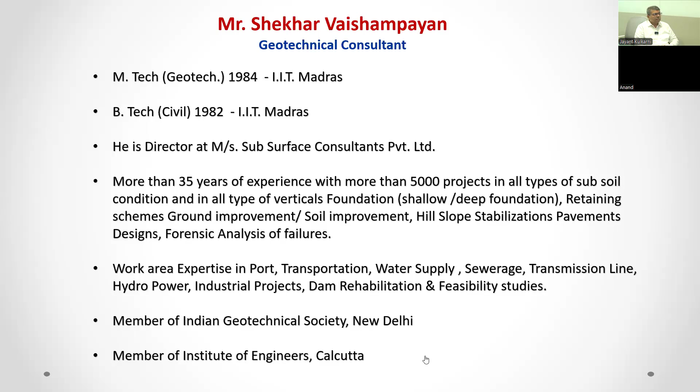Let's start. Yes, you require. I don't. Okay.

Today's subject is fundamentals and practical aspects of lateral earth pressure. I found that after the conclusion of the last webinar, participants from Epicons and Friends of Concrete had singled me out for answering these questions. Of course, I welcome that, naturally because of the nearness and friendship in the company. What I have done here is focus basically on the basic concepts, then how we carry out designs of the different retaining schemes or retaining methods, and I think that is long enough or big enough at the moment. So let us proceed slide by slide.

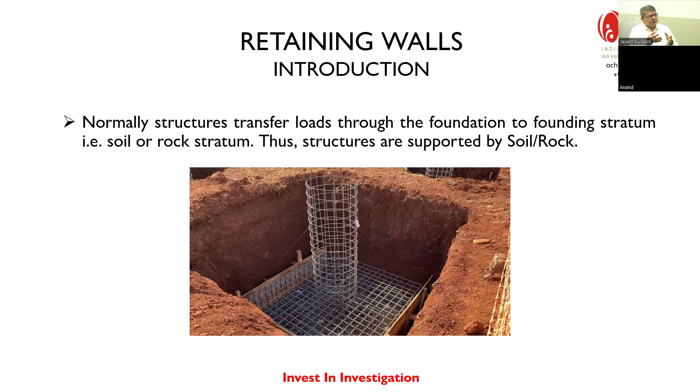So the retaining walls, as we know, let's get back to this. There are basically two types of structures. The structures which are normally supported on the soil - the foundations, the column loads go onto foundation, and the structures are supported on soil or rock stratum. But then, in the retaining systems, the retaining walls are the ones that provide support to the soil.

Basically what tends to happen is many times the excavation has to be kept near vertical or vertical. When you try to keep the excavation vertical, it is definitely going to collapse. Under those circumstances, we have to raise a retaining structure - basically that means here the structure supports the soil, whereas in the foundation case, the soil supports the foundation. This is the other way around. In this case, the structures support the soil or rock. So retaining systems are laterally loaded structures.

Now in these two retaining systems, there are two basic systems: one is non-embedded and the second is embedded. Let me elaborate further in the next slide.

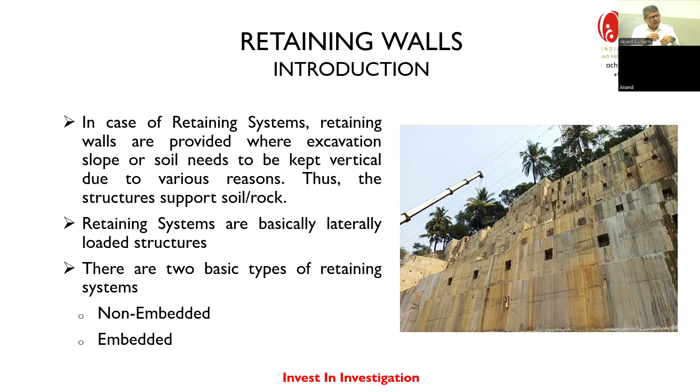Yes, the non-embedded type is the basic type of retaining wall we are all familiar with. When you construct a non-embedded type retaining wall, you excavate up to the foundation depth of the retaining wall. Then you construct the retaining wall. And after construction, you fill the soil back - that's why it's called backfill material.

So it will derive stability from what? It will derive stability from the basic self-weight of the structure, then sometimes the weight of the soil on the heel, then the passive pressure for the part which is below excavation depth. Sometimes if the passive pressure is not sufficient, you will provide a shear key beneath the foundation. And lastly, the SBC of the founding stratum. These are the factors which tend to provide stability to the retaining walls.

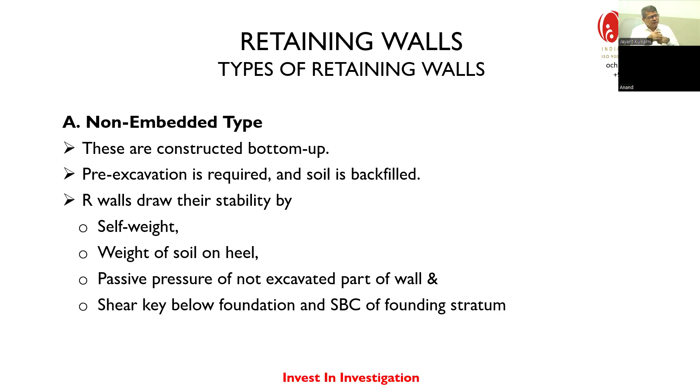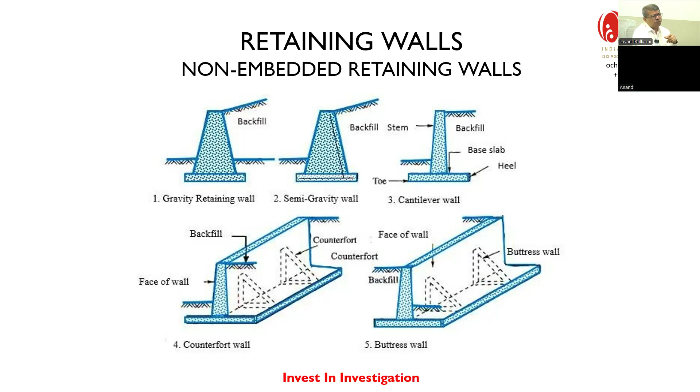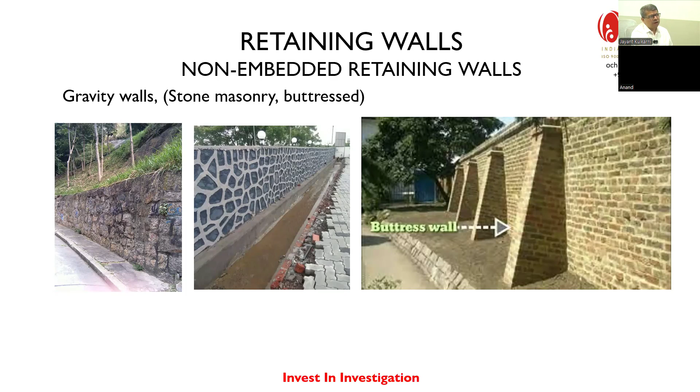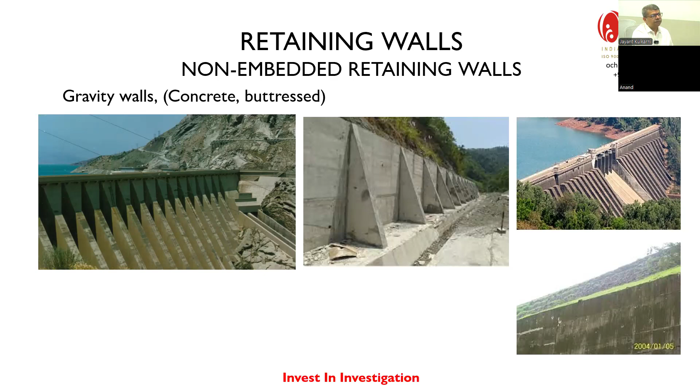Okay, so this is the typical RCC cantilever retaining wall, which you are quite familiar with. Most of you would recognize this kind of retaining wall. This appears to be 10 to 12 meters tall, at least 6 meters tall. The person standing here is assumed to be about 1.8 meters tall, so you can say this retaining wall is around 6 to 7 meters tall. Such a cantilever wall is possible.

Now, there are variations because of site constraints. You can see that in this one, they have put counterforts inside, and you can see tire marks here, so this is the area that's going to be filled up. You will fill up this area, and these counterforts will provide the necessary stability.

On the other hand, you can have an L-shaped wall, that is, without a toe. There is no toe, only heel, and you are going to fill the soil here. The weight of the wall is very nominal, which means the soil filled up here is going to impart the maximum amount of stability.

There is another side of the picture. When you have an excavated rock face, you will probably not have space for the heel part of the retaining wall. So quite a few times you end up with an outward L, with only the toe and the stem present. This type of retaining wall is also possible. Now, how is stability imparted to that? We'll see in the further slides.

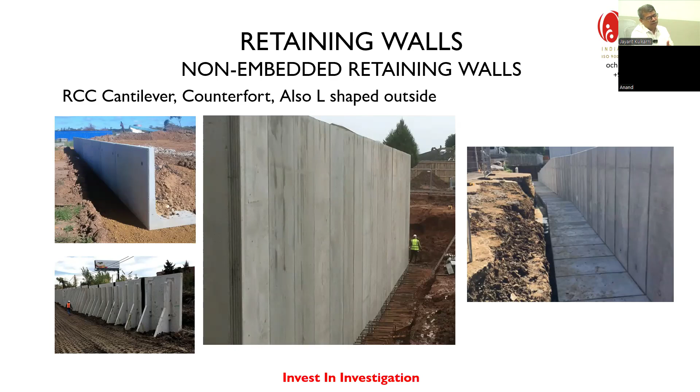Okay, then these are the flexible reinforced earth walls, which are non-embedded type retaining walls. You can see here they have used MSW, that is, mechanically stabilized walls or reinforced earth walls. In this, you put a geofabric, geonet, or geoweb, place a layer of soil on it, compact it, place another layer of geoweb or geomembrane, and compact it. That way, you can go on building this.

You can see that nearly 8-10 meters height of wall, or maybe more, is standing here practically vertically, and this is quite common now. While going by the side of a flyover, you would have seen these types of constructions frequently in Mumbai, outside Mumbai, everywhere in India now. With the development of NHAI, you will see a large number of such constructions executed right up to a height of 15-16 meters also for approach embankments.

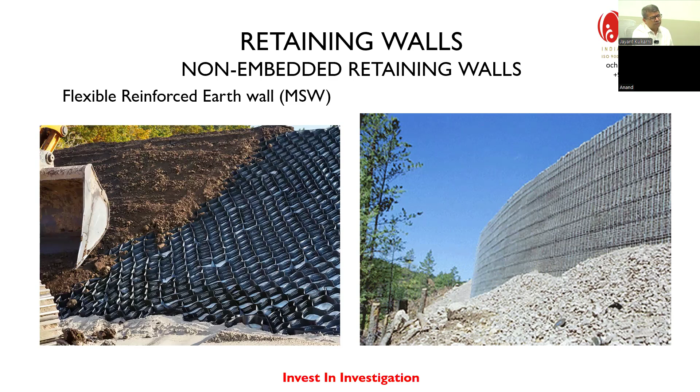Next slide, please. Yes.

This is another form of flexible reinforced earth wall - the gabions, which are known to us, like when you pass from Mumbai to Pune, you will see in the Ghat section many such boxes of stone kept there. They are known as gabions.

Vendor companies like Maccaferri offer this kind of service, and other companies also offer this, and you can design this. A typical Maccaferri design of gabions: we have a height h, and the base width would be not less than 0.6 times the height, then you provide a small offset of say 0.1 to 0.45 meter while going up, with a certain minimum top width not less than the width of one gabion, about at least 1 meter or more.

This can be arranged in different forms, and you can get a very stable system here, because for this backfill, since it has gone below ground level, it is not possible to slide. It offers a perfectly stable solution, yet it is flexible. This allows water to flow through, allows local repairs, and is one of the very versatile constructions.

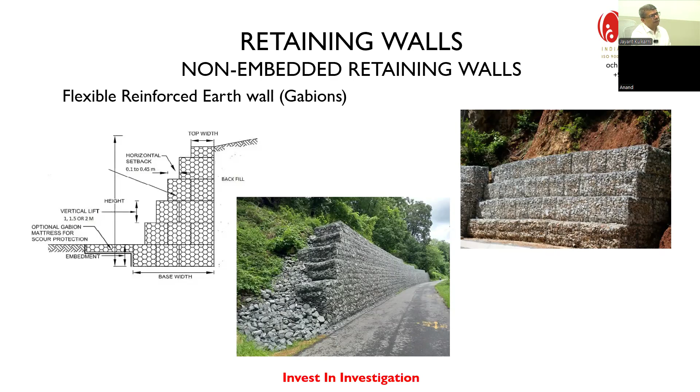Now we have seen a certain number of embedded and non-embedded type walls. What is the meaning of non-embedded type wall? By this time you must have realized that these walls don't penetrate into ground and derive substantial resistance from soil.

These elements are stabilized by passive pressure developed on the embedded part of the wall. If the depth of excavation is h, you install the pile or retaining element which goes through h plus a certain embedment depth d, and that depth d can be as much as 0.75 to 2 times the height of the retaining wall. This is true in case of purely cantilever embedded retaining walls.

What are the typical examples in the past? The typical examples were sheet piles - everybody asks, are we going to do sheet piles on our site, because you've read about them in textbooks. But there are also diaphragm walls or meter panels, which is a concrete variation, and more practical retaining piles are also used as embedded retaining walls.

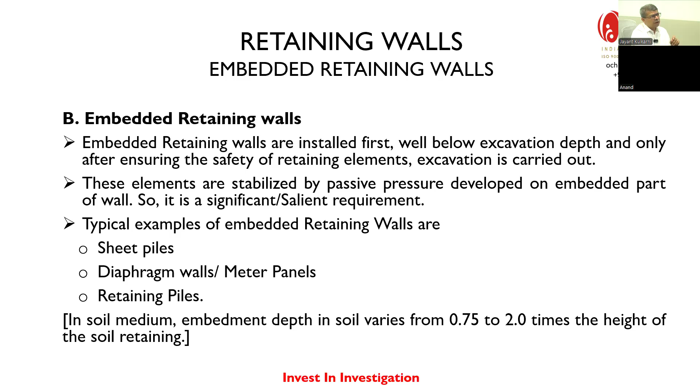Now I'll show you some examples of these retaining walls and how they are actually installed. You can see the walls are installed side by side, with a sheet pile section of a certain shape. It is installed by locking into the adjoining member - there is an interlock, so when the next section is put inside, it goes right inside and pushes through, locking into position.

When loaded, or after excavation, this tends to tighten up and provides nearly watertight excavation space. Now I'm using the term nearly watertight - remember this.

When trying to drive sheet piles, you can do so very well up to SPT value from 10 right up to 30, primarily in sands or also in clays. But if the SPT value is higher, there is a need to loosen the soil to some extent, done by a pre-boring operation at the location of the next sheet pile. When you pre-bore, the soil loosens up since you've disturbed it, taken out some soil, and reduced the density, so you can now drive the sheet pile comfortably. That is the purpose of pre-boring.

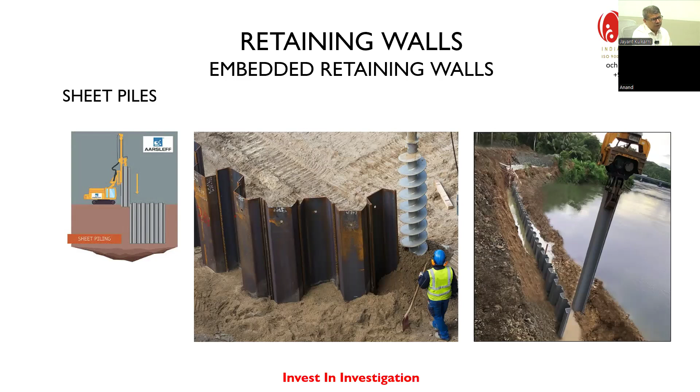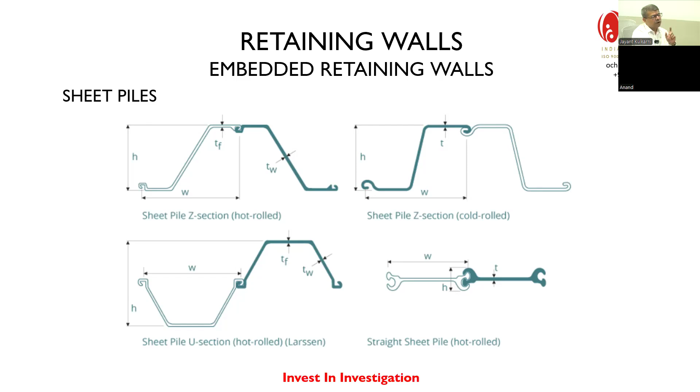There are some typical shapes, hot rolled and cold rolled, similar to each other. You can see the locking mechanism here - this is a female portion and this is a male portion. When driving, we can see this is a different kind of locking arrangement. Basically, each proprietor, when they manufactured these sheet piles, developed certain proprietary locking mechanisms, the strains, and the moment of inertia. All these have allowed them to stiffen the piles and make them capable of taking a certain amount of bending moments.

Now the sheet piles can be driven through most of the soils. What people found is that when they came to India or places similar to India, where steel was becoming very expensive - because when driving, the steel has to have high strength against the driving, it should withstand the stress - if you use it one time and give it up, it becomes very expensive. So to control the cost, multiple usage of the sheet piles was required. The alloy composition of the sheet piles became very critical, and the cost kept going up.

So people always come up with replies to such requirements. A concrete alternative to sheet piles was the diaphragm wall. You can see that at the end of each diaphragm wall there is a circular pipe inserted here. The sequence is shown properly here - you can drill the hole, this tool will show in the next slide, and you'll see the cage is lowered right up to bottom, and you lower a stop-end pipe on one end and on both ends.

This segment will not require a stop-end pipe. So then you concrete this portion fully through at least two tremie pipes, because the panels are usually 3 to 5 meters in width, and just one tremie pipe would not be sufficient. So they put at least two tremie pipes and they are concreted simultaneously. Then when you come to this point, you take out the stop-end pipes or the circular pipes, and the interlock between the diaphragm walls can be perfectly achieved.

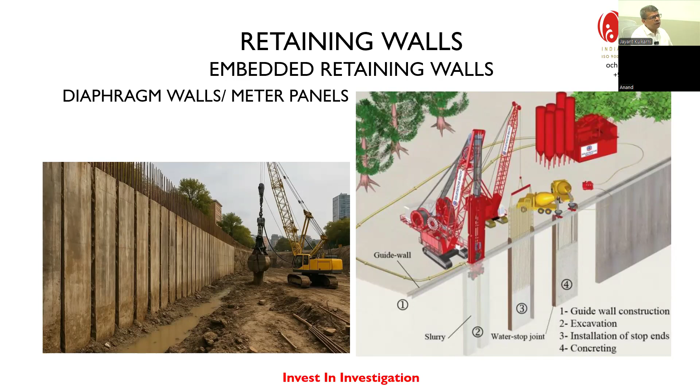For the diaphragm walls, you can see the kind of machines that are used, called grabs - these are tools used to cut even through rock. You can see these cutters are shaped in this direction, so they go towards the center from both ends and go on cutting a vertical, smooth face right up to bottom. So they're called trenchers basically.

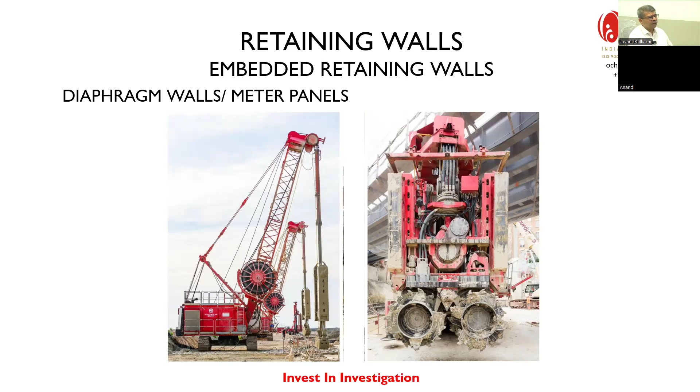This was a site done by Epicons, Bezel Pharma, and the retaining piles were designed by us, and the actual work executed at site - the retaining piles you can directly see how it is done. One more site you can see.

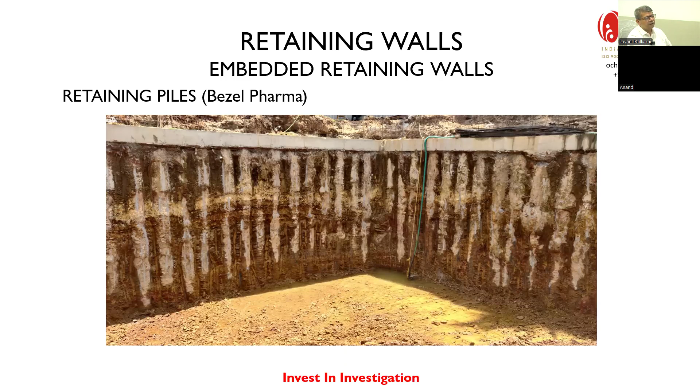This was a site at Bandra. The diameter here is 1000, and on this side it's 800, and these were also stabilized by putting anchors. One more example of retaining piles with the gap in between - you can see there's water seeping through these gaps.

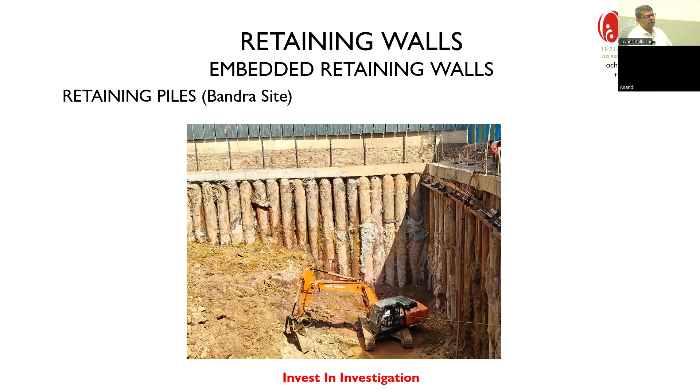Now we can compare the non-embedded wall and embedded wall, point by point by function. Non-embedded walls can be load bearing or non-load bearing, because non-embedded walls are actually above ground and the primary function is to divide space or provide enclosure.

If you look at the embedded walls, they are basically used as enabling structures to provide support to excavations or slopes. Then in case of designs, the non-embedded walls are not designed to resist significant earth pressure plus probably water pressure, and they also can take help from the internal structural members to prop them up or take the support.

Now, in case of embedded walls, they are also designed to resist the lateral pressures, but by embedding the bottom portion deep into the ground to develop the passive pressure.

The support for a non-embedded wall is a foundation as well as the internal propping, which comes from the structural frame. On the other hand, for embedded walls, it's only passive resistance from the soil, plus you can actually go for internal bracing, struts, or anchors. The inclined anchors we call tie-back anchors, you can use for additional support.

The non-embedded wall applications are very large: a wide range of construction purposes, interior partitions, exterior walls, non-retaining wall applications, or even, suppose you want to segregate in an earthquake zone, there's a hillock slope coming down, you can put a retaining wall there to segregate your bungalow or main building, for earthquake considerations also.

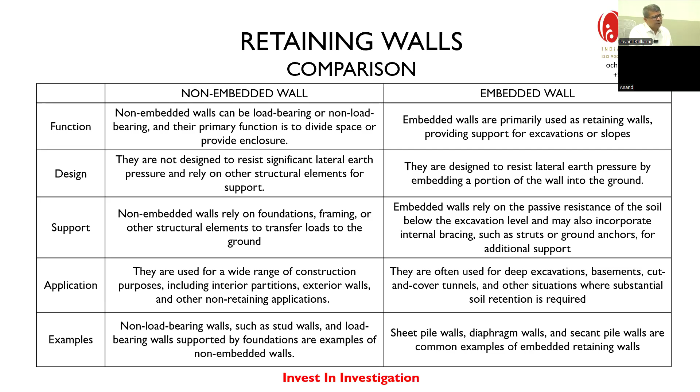Next slide, please. Okay, now we are going to the concept as such. What is the earth pressure? Here I think the purpose of today's webinar starts. I just gave you some nice pictures and showed you various examples to sort of warm you up, plus warm myself up.

You can see here there is an element of soil, a small element of soil, though it is shown as a quite big one, but it's a very small element at depth Z. Now, what is the vertical load acting on that? It is sigma Z, which is equal to gamma times Z, gamma D or gamma times Z. The pressure acting on the lower side would be gamma z plus delta gamma z, and that's what keeps this element in equilibrium in the vertical direction.

Now, what would be the lateral force acting on this? Lateral force acting on this would be the earth pressure or lateral pressure coefficient times the vertical load. So that is Ka or K times gamma z, which would be the lateral pressure.

Now there are three types of lateral pressures, termed as earth pressure at rest, active earth pressure, and passive earth pressure. What is the meaning of active earth pressure? Let's look at this wall. Let's say this is a wall, and the wall is not moving, standing in its own place. There is no deformation or deflection or displacement. When this thing is in perfect equilibrium, this is the earth pressure at rest. When the wall moves away from the fill, it becomes active earth pressure, and when the wall pushes against the soil, it becomes passive earth pressure.

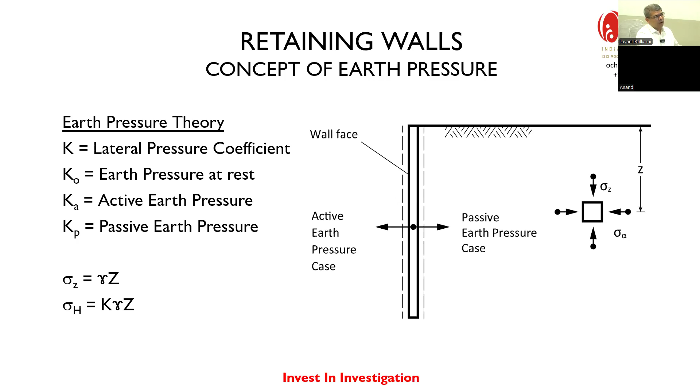So let's look at how these things are derived in a brief manner. Next slide, please. Yes, the first concept would be earth pressure at rest. You can see that on earth pressure, the work was done by Rankine, who was a very renowned physicist at that time, as early as 1857. So there's nothing new about it—this is as good as India's first freedom fight, actually.

He showed that behind the retaining wall, a soil mass actually forms a kind of failure wedge. Let's say this soil mass is going to move en masse, or as a rigid body together. It has got a weight W acting downwards.

It has a component perpendicular to the plane of failure, which is mg cos alpha, and one component parallel to the plane of failure, which is mg sin alpha, or sin theta, sin phi. So when this wall does not move at all, the wall does not deflect, it does not slide. In response to the lateral pressure, this condition is called the at rest condition.

There's a zero deformation condition. So K0 is defined as 1 minus sin phi, and the values vary from 0.4 to 0.8. Terzaghi states that after saturation, or after the wall achieves a steady state condition, the value tends to go towards 0.8, which is quite close to 1 actually. So that is the first idea.

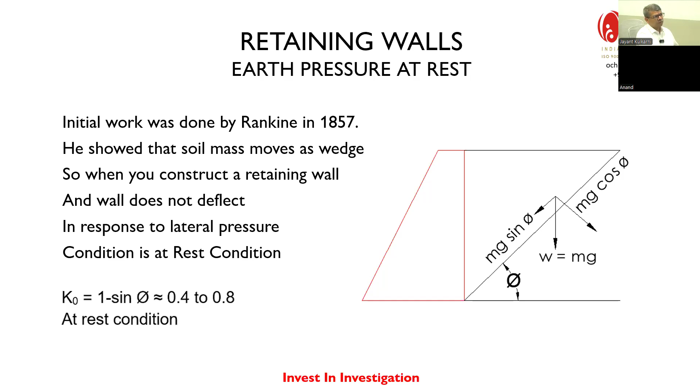Let's go to the next slide. Now we are talking about active earth pressure. In this case, the wall actually was there in its own place. There was a wedge, but now the angle of the wedge is different. It was only phi there, now this is 45 minus phi by 2. I haven't changed the diagram, but the angle is different: 45 minus phi by 2.

What happens is this pressure actually generates from the wall and it tends to tilt at the top. So I have drawn a diagram with the soil tilted, and the soil wedge has moved forward. There is a deformation at the top, which is delta A. That's the active earth pressure coefficient.

Now, if you recall, there's a component of the weight acting downwards, mg sin alpha. When the weight starts moving downwards, automatically there will be some friction. The friction would be mu times mg cos alpha, not sin alpha - mg cos theta, cos phi. Now that acts backwards, causing a reduction in the pressure actually acting on this.

So the active earth pressure is always less than the earth pressure at rest. I'm repeating, the active earth pressure is always less than earth pressure at rest. And you will find that the Ka value, the coefficient of active earth pressure, defined by 1 minus sin phi by 1 plus sin phi, is less than 0.5 - it rarely crosses 0.5.

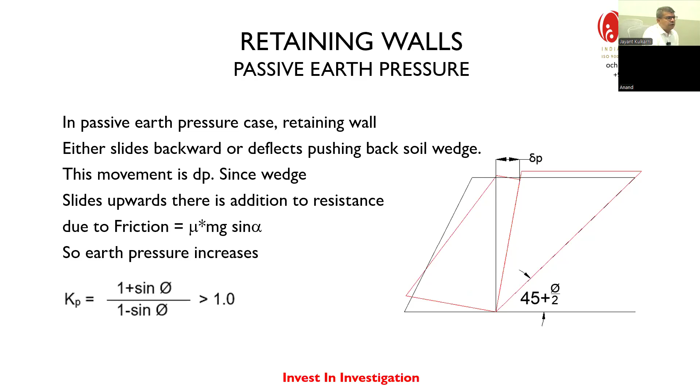So if you'll see - next slide, sorry.

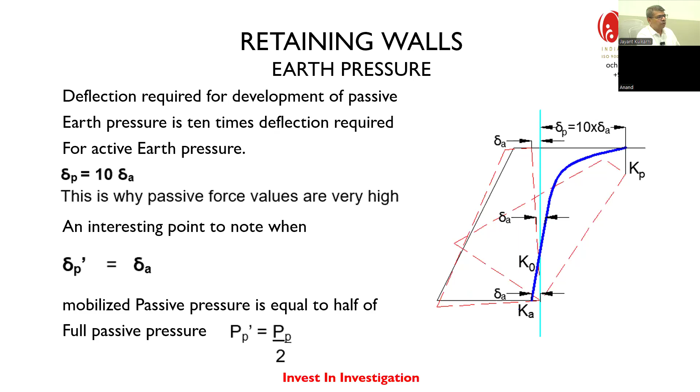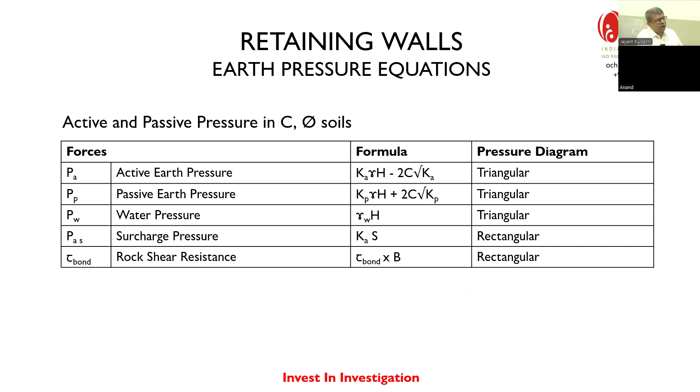In case of surcharge pressure, which is an additional pressure you account for, it is Ka times surcharge, and this is rectangular. And lastly, when you insert the retaining piles or embedded type walls inside the rock, you have to use the resistance to failure, which would be rock shear resistance. So tau bond into B is what we get, which is also rectangular.

So what are the other pressures we saw? Surcharge pressure—how do they come about? They come on account of construction materials loaded at site. Maybe there's a labor residing hut. There may be an adjoining property. There may be existing structures that are load bearing, or walls. So many other things are possible.

Many times what happens is, let's say we have selected a foundation level of 3 or 4 meters, and we still have to have a parking pit inside. If we have a parking pit inside, it may go down much below our foundation depth. In such cases, you'll actually have stepped excavation. So parking pits, tanks, and lastly the construction machinery kept outside—excavators, cranes, etc.—or even our concrete RMC trucks, all of them come and act as surcharge loads.

Typically what is done is you take surcharge loading intensity as 20 kilonewton per meter square. But supposing you know for sure that the adjoining building has a loading of 50 ton per meter square, I can use that as a surcharge. Or let's say you're putting a parking pit inside the raft, and the raft is loaded to say 700 or 800 kilonewton per meter square, and the parking pit goes inside—in such a case, much higher known surcharge loading intensity can be used for design of the retaining walls.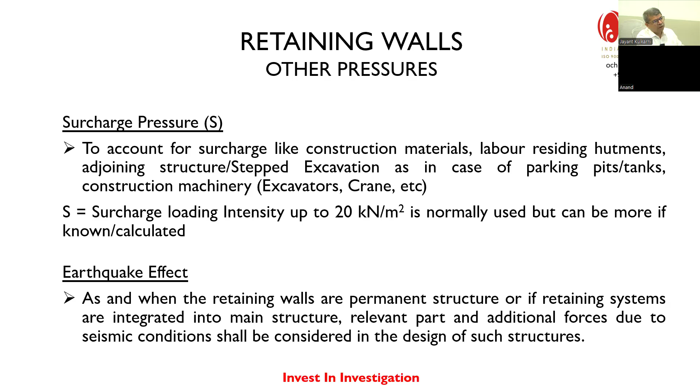Taking a small pause here, we have covered the necessary aspects of how the loads come on, what type of loads are likely on retaining walls, and other incidental loads, if any—I think they are basically not there. This covers everything. So for non-embedded walls or retaining walls, how do you design? This is a very straightforward textbook example. I'm not going into the example, but I'm giving a sequence. We have to ensure that non-embedded retaining walls are proportioned in such a way that the following checks are satisfied, and suitable stability checks yield suitable results.

So what are the checks? First, you go for sigma h equal to 0, so lateral pressures are equated. You check what is the resistance, and you always make sure that the sliding resistance, or lateral sliding factor, is more than 1.5.

Then the second check would be sigma m equal to 0. Here the factor of safety is always kept more than 2. The minimum required is only 1.5, but you have to keep 2 due to eccentricity conditions. Then third would be sigma v equal to 0, with the factor of safety basically 1.

Here the only thing we need to make sure is the Vmax, which comes from the equation: total load by width of the foundation, times 1 plus or minus 6E by B. You calculate the eccentricity and ensure Vmax and Vmin are greater than 0, and Vmax has to be less than the safe bearing capacity. If you achieve these two conditions, the foundation does not go into tension, so E is less than B by 6.

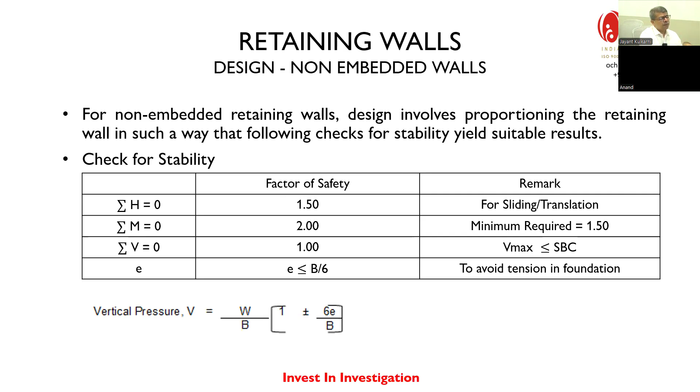Now, what is the procedure for embedded walls? Embedded walls, as we know, started as sheet pile walls or diaphragm walls. We also said initially that most of the time these are not used as part of the main structure. But whenever they are used, both sheet pile walls and diaphragm walls are designed to provide a watertight excavation face, so the forces acting on the walls are calculated per meter unit width. There is no gap in between, so you use per meter width destabilizing and stabilizing forces on both sides for the calculation.

But as and when these walls are supposed to carry vertical load for some reason, we have to make sure that the vertical capacity of the diaphragm wall or steel sheet pile wall is more than the vertical load coming on each column there.

Recently we had one experience doing a retaining wall, or shore pile retaining design, for I think Sister Helpers of Mary, an NGO in Andheri. The structural consultant was forced to take the last row of columns on top of the retaining piles. So such a thing can happen, and for that the top runner beam was designed separately, and the columns were loaded directly onto these piles. Such a modification is definitely possible.

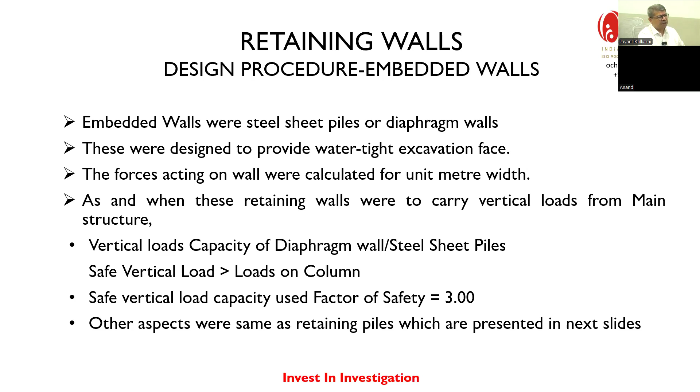Other aspects - going back to this, we used sigma v equal to 0. Actually sigma v is not used here, the FOS was 1, sorry. So these aspects are same as retaining piles. We'll present a design of retaining piles in the further sections. Next slide, I think I got a bit mixed up.

Design procedure for retaining piles. I will start retaining piles as a separate unit practically, because retaining piles have become an integral part of our designs for basement construction now, and they're very important. So we need to understand them very carefully and step-by-step. There are 3-4 slides that will run after this, so please pay more attention.

Retaining piles are a vertical cantilever beam. It is designed to carry lateral load imposed after excavation, so the lateral load will come only after excavation. It does not carry any vertical load other than self-weight. Remember, for the earlier slide I said vertical loads, if required, have to be carried by the safe capacity of the pile. In this case, normally we don't have vertical load other than self-weight coming on the retaining piles.

So while designing retaining piles, moments and lateral equilibrium is ensured: sigma h equal to 0 and sigma m equal to 0. In addition, deflection of the retaining pile head shall remain within permissible limit from serviceability considerations, so lateral deflection h is less than the permissible limit. Next slide.

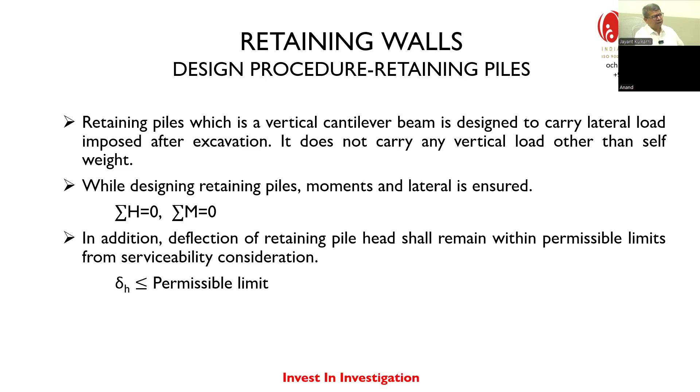To achieve stability of a retaining pile, we need to first estimate destabilizing forces acting on it. We are evaluating forces on a per meter width basis, but to be more accurate, let's note that retaining piles have diameter d with intermediate clear spacing s. Therefore, destabilizing forces act on the width of d plus s.

On the other hand, for the embedded part of the pile, the stabilizing force will act only on the width of d. So d plus s is the destabilizing width, and d is the stabilizing width.

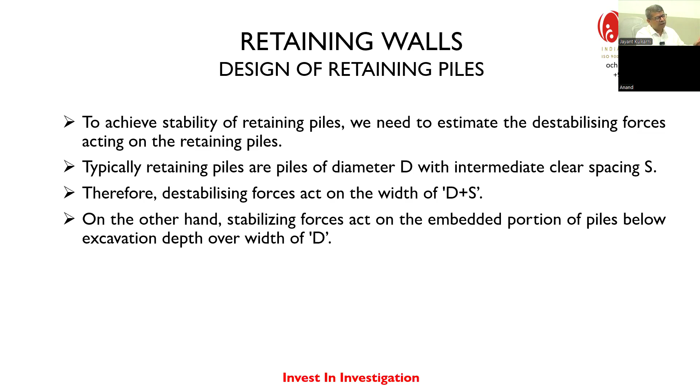Destabilizing forces, which we've gone through earlier, act on d plus s: active soil pressure Ka into gamma H, pore water pressure gamma W into H, surcharge pressure Ka into S, and earthquake effect if the retaining piles or walls are part of a permanent structure.

But normally, if it is purely a retaining pile, this earthquake factor is zero, since retaining piles are meant to be enabling works with a life not more than 5 to 7 years. In that case, we need not consider earthquake effect.

Then what are the stabilizing forces? They act on the width of diameter d, up to the embedment depth d, which we need to calculate first. The passive pressure of the soil is Kp into gamma h, plus 2c under root Kp.

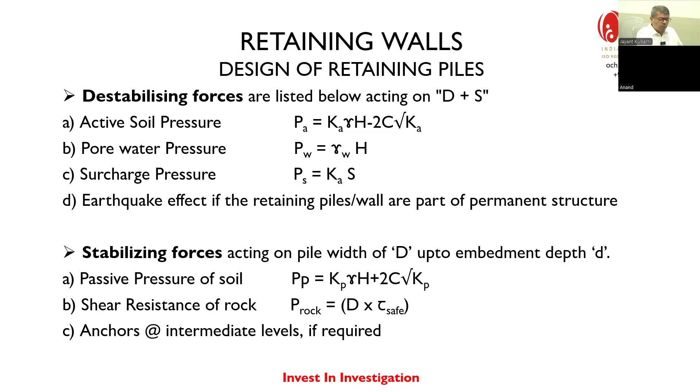And there's shear wherever the pile goes into or is inserted inside rock. So P rock is d times tau safe, that is the bond stress. Anchors may also be used at intermediate levels as and when required.

In designing the retaining pile, first you calculate the minimum depth of embedment. We solve for sigma M equal to zero, taking all the destabilizing forces and calculating the bending moment at depth d.

The bending moment should be taken at the bottom of the embedment depth, below the excavation depth, which is unknown initially and is what we are going to calculate. You take the destabilizing forces, calculate the resultant moments using various lever arms, then calculate the depth.

Put sigma M equal to zero and solve. But in this case, if the pile is in soil, you adopt a minimum factor of safety of 2 for calculating the depth d.

Why? Because when the pile is embedded in soil, recall that when delta P dash equals delta A, then PP dash equals PP by 2, the full passive pressure divided by 2. Since only half the passive pressure is developed, applying a factor of 2 actually results in an effective factor of safety of only 1, not 2. Please note this.

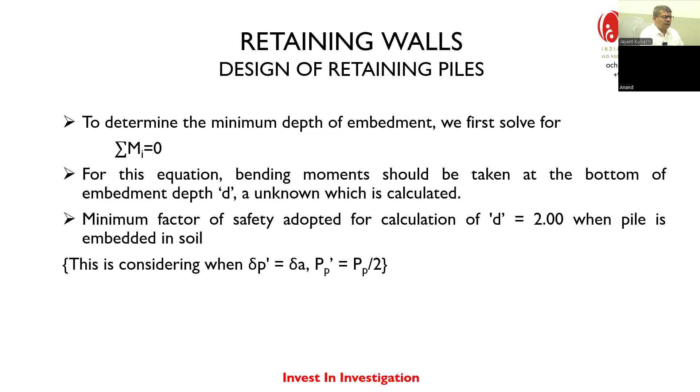In case of rock stratum, use an embedment depth with minimum factor of safety not less than 1.5. This is in view of the factor of safety already employed when calculating tau bond, so we can reduce the factor from 2 to 1.5.

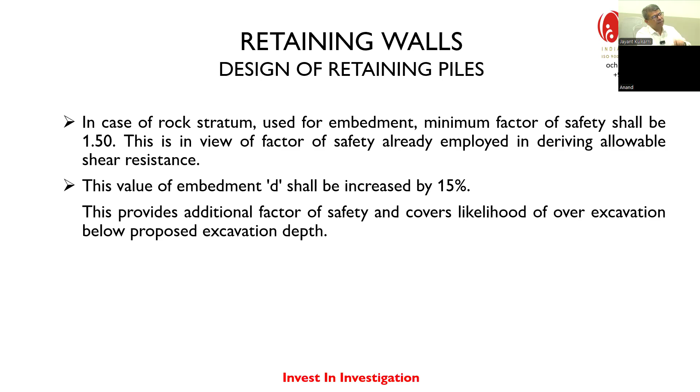So then what do we do next? We put sigma h equal to 0, put the shear forces to 0, and find the point of zero shear force. You can use that, it's a routine thing for you. You will locate the point of maximum bending moment. A typical bending moment diagram would be like this.

This is probably just at excavation depth, and this is just below excavation depth, where the bending moment is maximum. Now, when you calculate the maximum bending moment, you can provide necessary reinforcement steel for this maximum value.

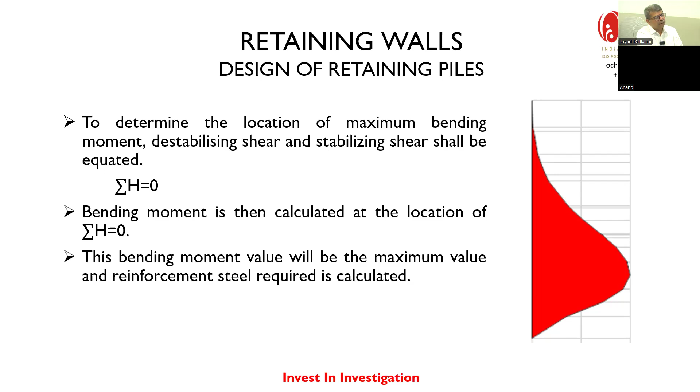Now it can happen that this bending moment value is much higher than what the section can take. In such case, when the reinforcement steel exceeds 2%, congestion of reinforcement can happen in the pile section, and therefore provision of a tieback anchor or strut has to be considered.

Remember, anchors were required as a stabilizing measure. Now we reanalyze the retaining pile using these stabilizing point loads and recalculate the design bending moment. The design bending moment has to be brought down so that it is well below 2%. This is the point we use again - not necessarily everybody does this - that the magnitude of the anchor is such that you keep destabilizing shear force in check.

Let's say that is 100 kilonewtons. Then the capacity of the anchor will try to keep it below 100. That is just to ensure that negative bending moment is not formed in the pile. If negative bending moment is formed in the pile, there is a tendency for the pile to move away from the excavation face. To avoid that, we actually do this.

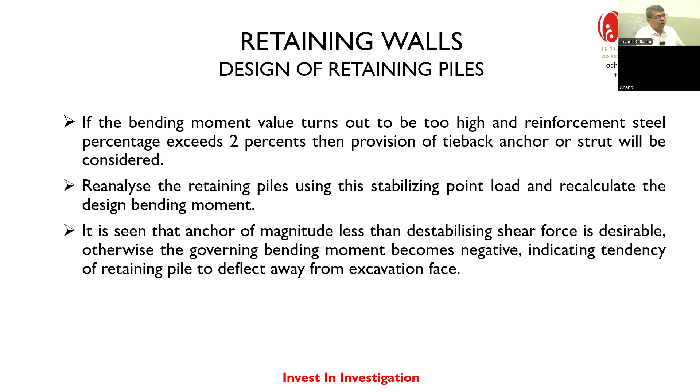When the bending moment is positive, the pile will tend to deflect onto the wall - it will not move away from the wall. So negative bending moment is avoided as far as possible.

So once again here, that's how you basically design the retaining pile. So the embedded type of retaining wall we have designed.

Now we go to the next one, what is the permissible deflection for such piles. The retaining piles are treated as a vertical cantilever beam, either propped or unpropped condition. But because they are installed by piling rigs, we are calling them retaining piles. Otherwise, they are not retaining piles - they are simply a suitable construction method used for installing vertical cantilever beams, circular shaped. So they are retaining piles.

So once you say the word pile, one tends to use codes 2911 or 14593. Now they are not actually applicable for this. For designing, you should use only IS 456.

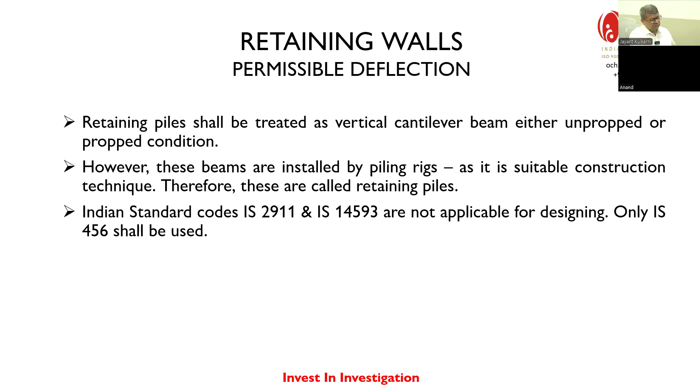Okay, so what tends to happen is the permissible deflection criteria for satisfactory performance is related to serviceability - a factor already known to you. So in sandy strata, permissible deflection in case of active earth pressure is 1 in 1000, and in cohesive soil it is 1 in 500. These are both true for active pressure. Remember, deflection is 1 in 1000.

If it is going to be a passive condition, then it will be 1 in 100, 10 times delta P. Delta P is 10 times delta A. And in case of cohesive soil, it will be 1 in 50 in case of passive pressure. But normally, for satisfactory performance of structures in mixed soil conditions, you will tend to retain this deflection to 1 in 500, which is acceptable. You might note that this is also a satisfactory serviceability criteria from a settlement point of view.

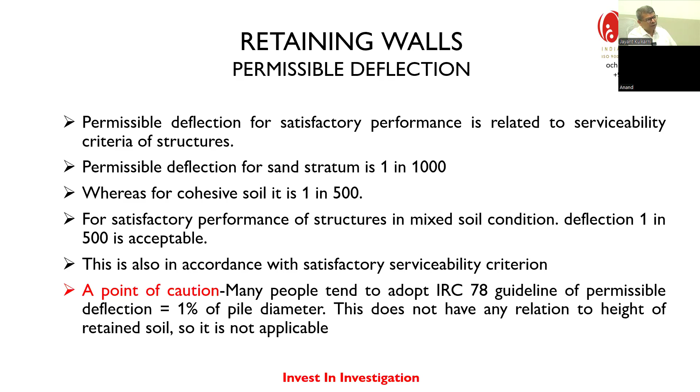Now here is a point of caution I would like to raise: because a number of people have constructed bridges, you will find they tend to adopt IRC 78 as a guideline for permissible deflection. IRC 78 says permissible deflection is 1% of pile diameter. Now 1% of pile diameter is not related to the height of the retained soil - it is not connected at all. It is only related to the section. So in this case, for retaining piles, this condition is not applicable.

Okay, now we are going to go back to some questions sent by Epicons, where they asked about submerged weight and where it is applicable - where you take the hydrostatic pressure or pore water pressure and submerged density, versus where you take the saturated density. So I'm trying to first define what is submerged density and what is saturated density. In this computation, total and effective overburden pressure is determined.

For the same, you can see that the saturated and submerged density of the soil is required at different depths. Specific gravity of soil and void ratio of the soil are the two main components required for calculating saturated density as well as submerged density. If you determine the void ratio E reliably, the saturated density value will not be at variance or make a large error. So you use the equation gamma W into G plus E divided by 1 plus E.

Now what happens in case of sand? You will get values around 1.8 to 1.9. And in submerged density, this whole thing is not minus 1, it is G minus 1. So if this value is 18 kilonewtons, you will find this is about 8.5 to 9 kilonewtons. It is not minus 1, remember this.

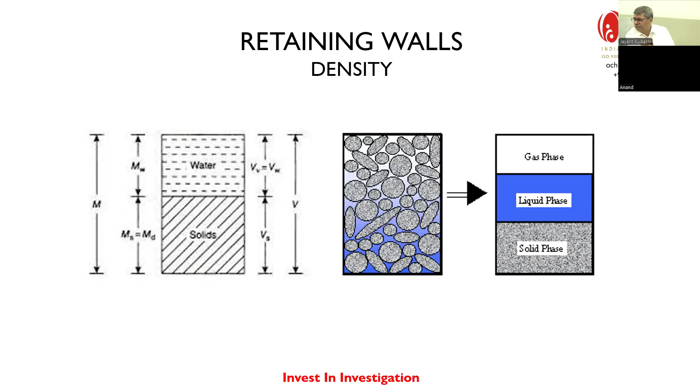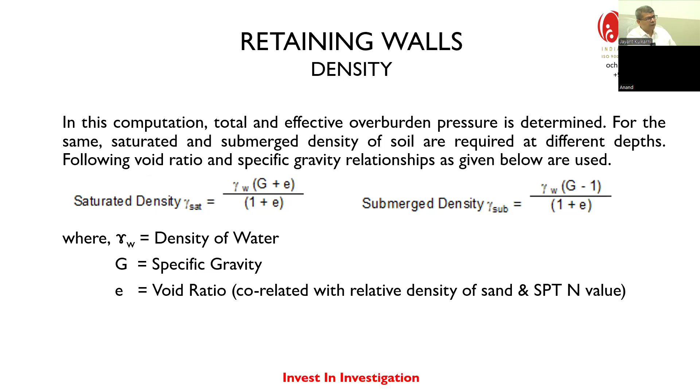That's why this equation becomes important: G minus 1 divided by 1 plus E. So in case of sand, if this is 18, this will be 8.5 or 9. If this is about 1.9 in case of clay, this will be around 9.5 to 10 in case of clays. Okay, now we can go forward.

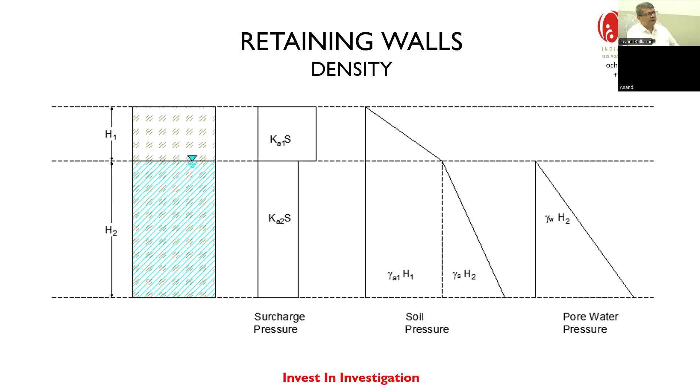This is a question asked by one of our friends, I think Sanjay Jadhav. He was asking under which conditions you can take the K0 value. So we are trying to answer that.

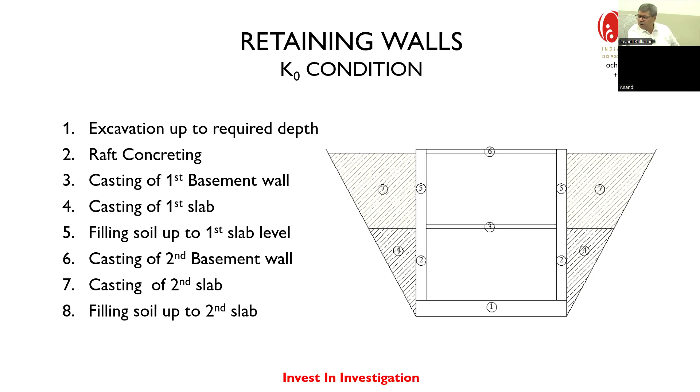On the other hand, if you put retaining piles instead, next slide please.

In case of retaining piles, at depth H1, I have to put the prop at this level. So when I come down here, this part will deflect first - a small deflection for the excavation depth H1. Whatever deflection happens, I cannot go back. I put a prop here in place; I cannot push it back by putting a jack in between. It's not possible. So up to this point, Ka condition is applicable.

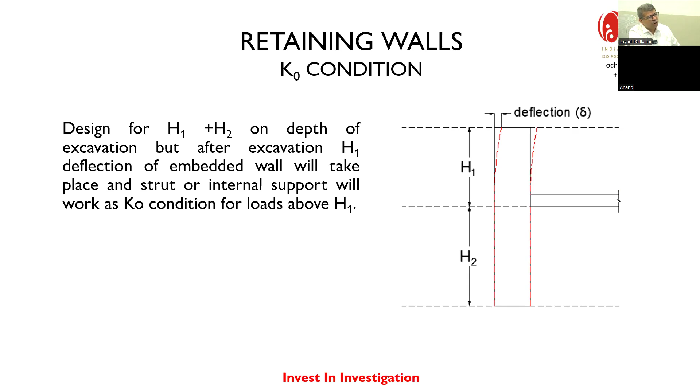But once you put a prop and excavate below, K0 condition is applicable. So this is a combined condition - both K0 and Ka are acting in this case.